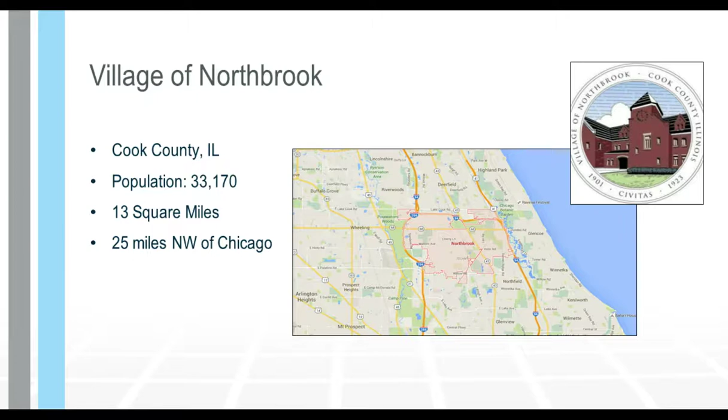The Village of Northbrook is located in Cook County, Illinois. We have a population of roughly 33,170, 13 square miles, and are located 25 miles northwest of Chicago. The Village of Northbrook is known for great schools, spectacular parks and programs, and a high level of municipal services to our residents and businesses.

Unfortunately, sometimes a good master stormwater management plan requires flooding, and the Village of Northbrook is no different in that case. In 1982 and '87, we experienced quite a bit of flooding, with 6.5 and 7 3/4-inch events during those times. In 1987, roughly 818 properties, or 1 out of 12 properties within the village, experienced some type of flood damage which required special debris pickup.

With that, our first stormwater plan was created in 1993. It also created the Stormwater Management Commission, which provided oversight of all stormwater-related issues within the village. They reviewed the causes of flooding, projects to reduce the flooding, and property protection programs. In 1996 and 2002, the program plan was updated for current cost and completion of projects.

After that, we had two more significant rainfall events, one in 2008 with roughly 6.5 inches of rain, and another in 2011 with 5 1/4 inches of rain. This really put a focus back on stormwater, and we'd only completed roughly 9 projects since the inception of the plan, and stormwater still was a village-wide issue.

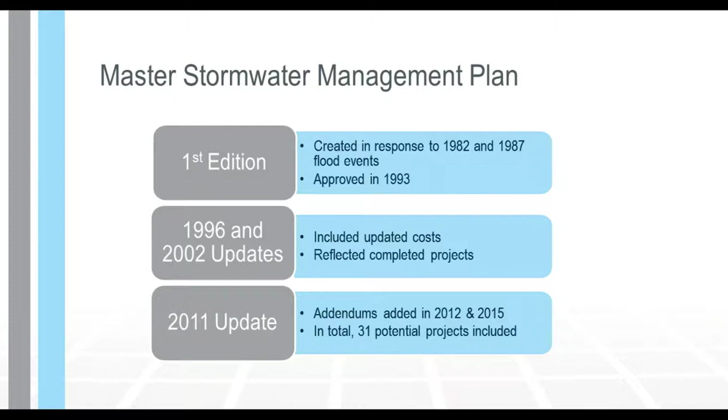Since 2012, the village has completed roughly 11 projects at an estimated value of $18 million. There are 20 projects remaining with an estimated value of $13 million to complete.

One project included in the master stormwater plan was the detention facility at Wescott Park, shown above in red, within the Sunset Field subdivision. This is one of our larger watershed projects, and it stood out from the rest because this was an area where we had previously identified projects as unbuildable. It was the most expensive project within the plan.

It provided a large open space in the red area, owned by the Park District and the school district, for potential surface detention. It could provide large relief for properties in the neighborhood. The watershed project also provided benefit to downstream people who receive flooding, and would allow the building of 3 other future neighborhood projects once completed.

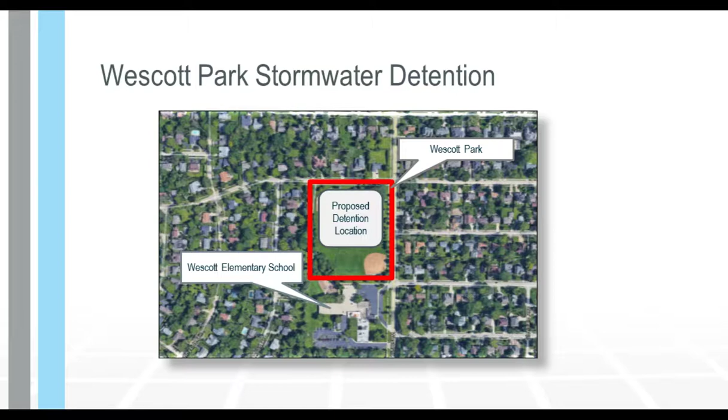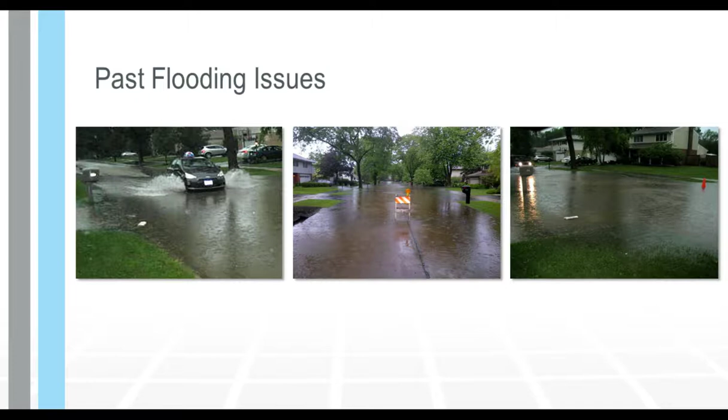As mentioned, there's been past flooding issues in this area along Wescott Park by Farnsworth Lane and surrounding streets. Unfortunately, during flooding events, 2 to 3 blocks are impassable for our emergency vehicles. Sunset Field Subdivision is an older subdivision, platted in the 1950s, built without any detention and with undersized storm sewers compared to today's standards. The only real open space available in this neighborhood is at Wescott Park.

During the study phase of the project, we knew that the Master Stormwater Plan project was feasible for Wescott Park. Unfortunately, we wanted to make sure we refined the project due to the potential cost and the need for interjurisdictional cooperation, since the village does not own any of the land the detention would be built on.

The area in red on the slide shows the extent of flooding prior to the project. There are roughly 10 structures that experience flooding during a 25-year event, and roughly 83 properties that have some type of flooding during these events. During the study period, the village retained Baxter and Woodman to provide an evaluation to refine the project details prior to going to design.

One of the things they looked at was different surface detention that could be provided, underground detention, and also a hybrid combination of the two. These different options were presented and discussed with both the Park District and the school district to try to identify a project which was agreeable to them, since it needed to be buildable, especially since it was going to be on their property and not the village's.

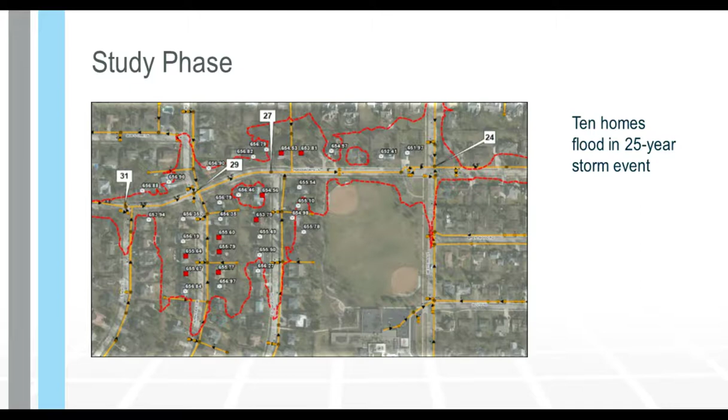At the end of the study phase, this graphic shows where the proposed detention location would be and the proposed sewer route. The village would have preferred a configuration allowing surface detention, but unfortunately we had to keep the detention located on the Park District property, shown as the hashed area with the proposed detention identification.

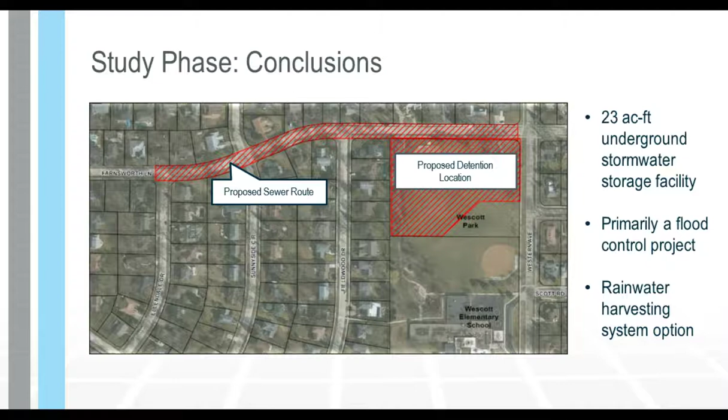We also had to keep a portion of the south ball field playable during construction. The 23 acre-feet of storage is entirely on the Park District property, and the other storm sewer infrastructure improvements are within the village's right-of-way.

At the conclusion of the project, using XP-SWMM, the results shown in blue are the impacted areas of inundation after the project would be complete. It provides 25-year level protection for all homes.

The 10 homes that had prior flooding during the 25-year event were completely eliminated from flooding, and there were also 83 other homes that saw some benefit from the project. One of the key components is that while we didn't eliminate all flooding, emergency vehicles do have the ability to pass these areas during flooding events.

At the end of this phase, Baxter Woodman identified an opportunity to store and reuse stormwater for irrigation of the ball field, and a possible partnership with the Metropolitan Water Reclamation District of Greater Chicago, or MWRD.

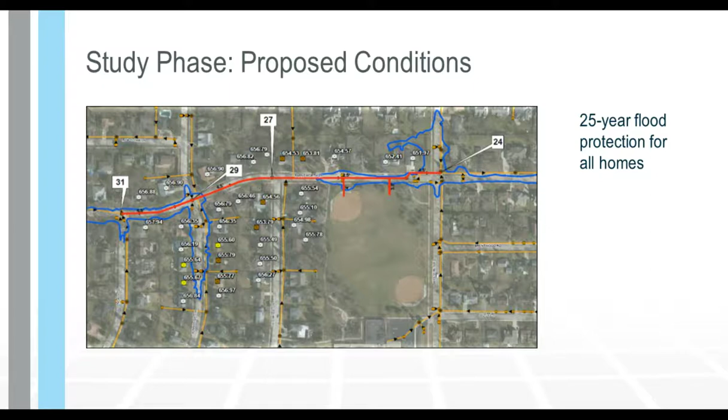Due to the coordination involved, prior to going to full design, the village worked with Wescott Elementary School and the Park District to set up the ground rules for the design process. We wanted to make sure that everybody was on board with the parameters so that any future changes could be avoided, along with costly changes to design.

Some of the things identified were defining the construction limits. As previously mentioned, the south ball field needed to be playable throughout construction for not only the school's use but the Park District's as well. We had a 9-month construction schedule because the north ball field, which the Park District regularly programmed, would be out of use for roughly one whole season, so we had to get that done so it could be used the next year. It also identified issues with traffic for school drop-off and pickup due to the large amount of truck traffic that would be generated by the project.

It also identified that the village would be installing an irrigation system for the ball fields, which would be owned by the Park District in the future. During the design phase, the village entered into a formal intergovernmental agreement with the Park District to finalize the details of the agreements.

As previously mentioned, the village had an opportunity with MWRD to build a rainwater harvesting system for this project. The village's master stormwater management plan had identified other best management practices that could be used, but nothing to this scale. The village and MWRD have worked on multiple other projects together, but none with really a green component. So the village and MWRD were really excited about the rainwater harvesting component of this project, and it would be a showcase project not only for them, but for the village as well.

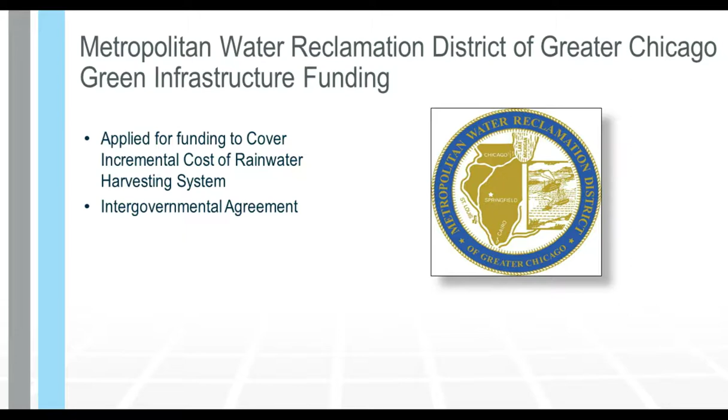Thank you. Paul? Thank you, Kelly.

As Kelly mentioned, the village ultimately chose the underground detention option, and Baxter Woodman was authorized to begin final design in the fall of 2014. The total cost of the project was estimated to be about $10.3 million without rainwater harvesting, which would only be included if grant funding became available to cover the additional cost.

The main components of the design were a 23 acre-foot underground detention facility, 3 blocks of new 42-inch diameter sewer to convey stormwater to the storage vault, constructed in parallel to an existing 42-inch sewer, high-capacity inlets to capture roadway flows, a restrictor to limit downstream discharges, and an irrigation system to water the ball field.

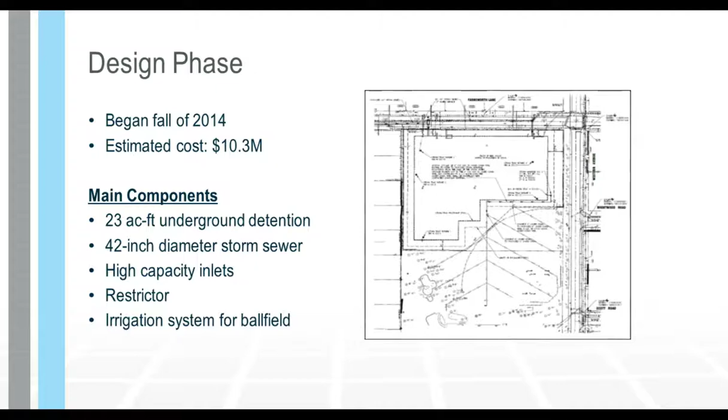Once the underground detention option was decided on, the first major design decision was choosing the type of underground storage system we would use. We needed to make sure whatever we selected would satisfy all of our design criteria and meet the village's expectations. First, the height and footprint of the detention facility were dictated by our site constraints, so the required 23 acre-feet of storage had to fit into the available space.

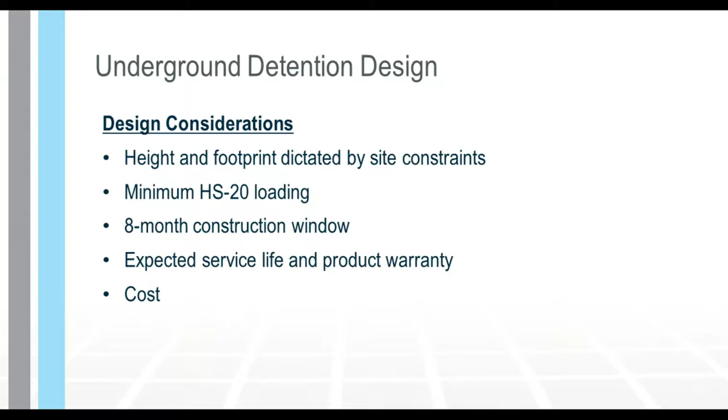The structure also needed to provide minimum HS-20 loading, because at some point the driver of a truck or emergency vehicle might drive over the field without knowing what's been built underneath it. The village and park district had agreed that use of the north ball field would only be lost for one season, so construction had to be completed in an 8-month construction window. The detention system would need to provide a long service life with a strong warranty. And finally, cost was very important—the village needed the construction cost of the underground detention to fit into their overall budget for the project.

The village wanted the detention to drain by gravity so they wouldn't have to deal with operation and maintenance of a pump station. Therefore, the invert of the receiving storm sewer limited the maximum height of the storage vault to about 10 feet.

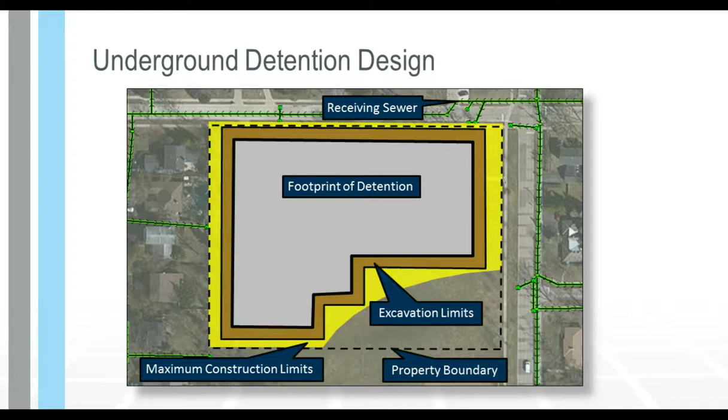We considered 5 main types of underground storage systems for this project. The first was StormTrap's DoubleTrap product, a modular precast concrete system. This type of detention provides very efficient storage, which was important given our particular site constraints. In fact, about 93% of the total volume would be open and available for storage for our particular structure dimensions.

We also considered corrugated metal pipe systems, which provide storage in circular pipe as well as the void space of the backfill. Those options offered some potential cost savings. However, the system provided less efficient storage than StormTrap, making it a very tight fit for our site. Additionally, the village had some concerns about the durability of CMP and the limitations of the warranties that came with the products we considered.

Another option we looked at was an open chamber with a concrete slab roof supported by reinforced stone aggregate piers and walls, which would essentially be made up of stacked gabions. About 64% of the total structure volume was calculated to be available for storage, which wasn't going to work for our project.

Cast-in-place concrete storage was another very efficient option, which offered a lot of design flexibility. However, it would have required structural engineering, and it was ultimately ruled out because the curing times wouldn't work with our 8-month construction window.

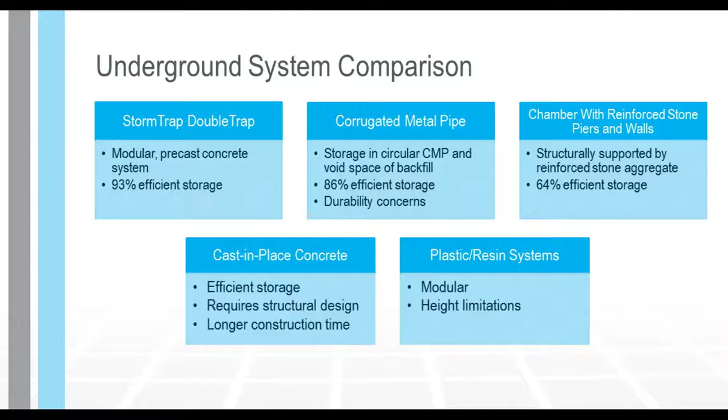After considering all of these options along with our input, the village decided to go with StormTrap's DoubleTrap product for the underground storage vault because it was a perfect fit for the project needs. The system is made up of modular precast concrete units which can be configured into just about any footprint. The structure can be up to 11 foot 4 inches tall, which worked with our proposed height of 10 feet.

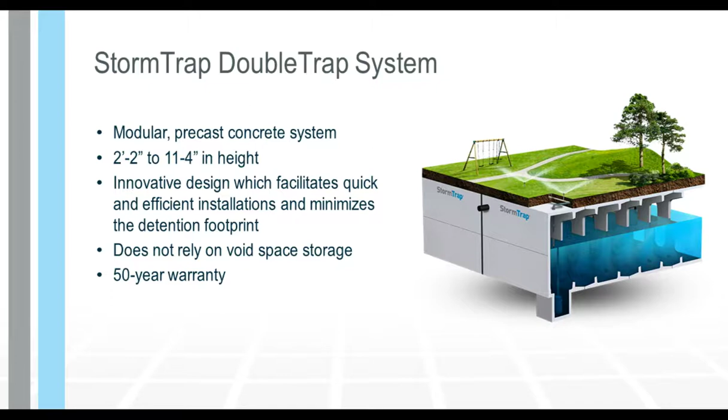The StormTrap design allows for quick installation, and the pieces provide very efficient storage, which minimizes the overall footprint. The system doesn't rely on void space storage, which means any sediment accumulation can be easily accessed and cleaned. And finally, the 50-year warranty that StormTrap provides really stood out from the other options we considered.

In a minute, I'm going to play a short video showing a pretty basic rendering we put together prior to construction, which showed what the StormTrap and restored ball field would look like after completion of the project. We used this at a public informational meeting to give residents a better understanding of the project and the scale of the underground storage that was going to be installed.

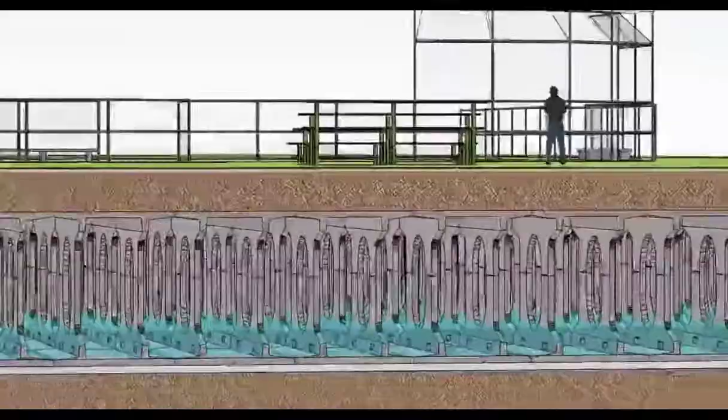The village authorized Baxter and Woodman to move forward with the design of the rainwater harvesting system alternate in August of 2015, when the village's intergovernmental agreement with MWRD was being finalized. The concept of the design was to store water in the StormTrap for reuse and then pump that water from the StormTrap to the irrigation system.

The system would also use available weather forecast data to automatically drain down the StormTrap in advance of large storms, making sure that the full storage volume would be available for stormwater when it was needed the most.

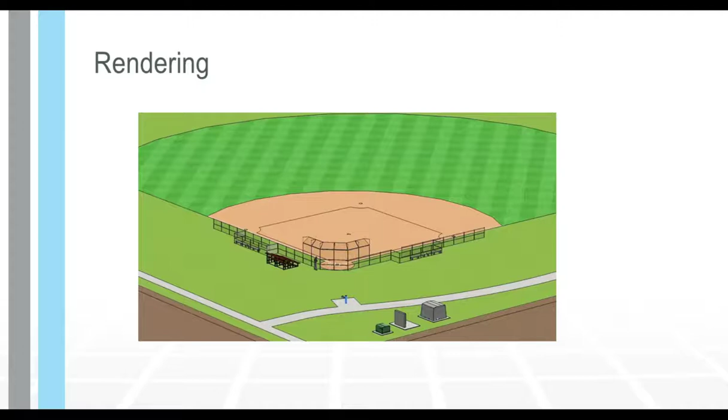Because the Illinois Department of Public Health considers spray irrigation systems to be plumbing systems, they had to review the project and issue conditional approval.

IDPH required that the irrigation system meet NSF 350 standards for water quality. They also required monthly testing for E. coli by an IEPA-approved lab for 1 year after startup. And also, irrigation hours had to be limited to the nighttime to avoid unnecessary exposure to people. Even though the water will be treated, it still won't be potable, and they don't want people being sprayed inadvertently or kids running through the sprinklers.

The village continued to look for opportunities to use harvested water in other ways as we were progressing with our design, and they eventually asked us to add a spigot to the project, which could be used to fill tanks for watering plants and trees at other locations around the village, and for vac trucks and street sweepers as well.

The Illinois Department of Public Health typically doesn't deal with requests to use harvested water off-site, so this complicated the approval process a little bit. We did eventually receive approval with additional conditions. They required installation of a locking mechanism on the spigot and non-threaded fittings so that it wouldn't be confused with the potable water source. And then once the water is taken off-site, IDPH won't allow any type of spray application. They will allow the village to use harvested water for vac trucks and street sweepers because they aren't sanitary equipment.

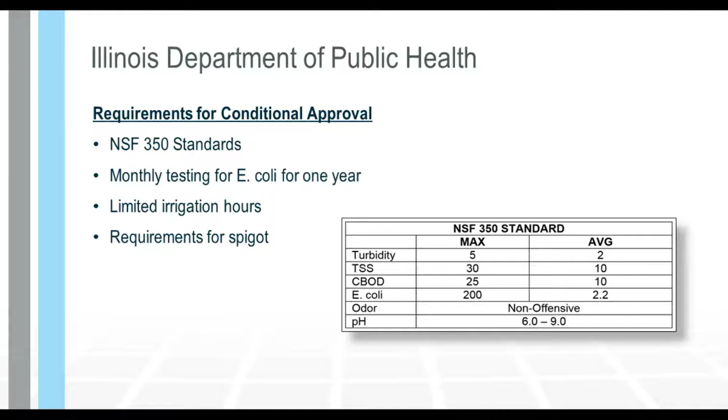In order to meet IDPH's requirements for water quality, two major components were added to the design. The first is pretreatment filtration upstream of the StormTrap, and the second was UV sanitization to treat water before pumping it to the irrigation system.

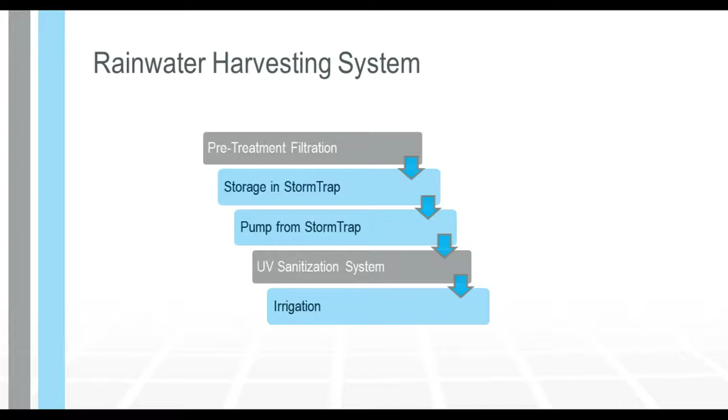Pretreatment filtration is provided upstream of the StormTrap with a precast concrete chamber located in line with the inflow pipe. That chamber contains a filter which captures leaves, trash, and other floatable debris, and it also removes suspended solids and hydrocarbons.

Filtration is important for the functionality of the rainwater harvesting system because it prevents clogging of the sanitization and irrigation equipment. Additionally, it reduces the frequency of maintenance required to clean debris and sediment from the bottom of the StormTrap.

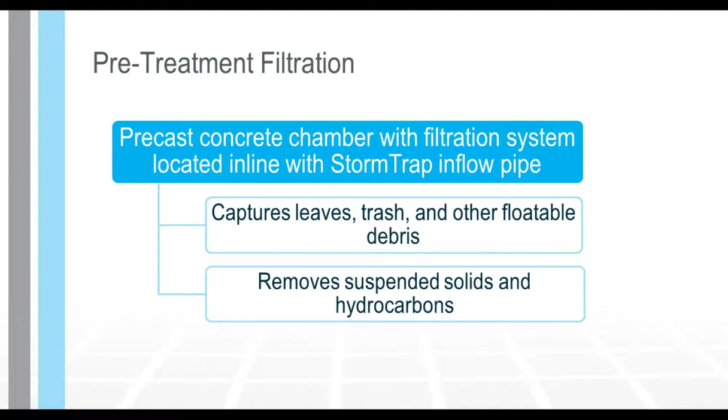Once the inflow water is filtered, it needs to be stored in the StormTrap for reuse. Our original design concept was to install a gate or valve at the outflow pipe to hold back water. The main advantages of this type of system would be it would require no modifications to the original StormTrap design, and also the StormTrap would drain entirely by gravity.

However, watertight sealing of the joints would be required over the full footprint of the StormTrap, which we learned would be more expensive than anticipated. Additionally, the gate or valve would need to default to open in any sort of failure condition. So in the case of, for example, power loss, or if the water level sensors were giving back bad readings, we would need to find a solution that would default to open to make sure that all of the stormwater storage was available. We ended up ruling out this option, however, because the estimated construction costs wouldn't fit within our available budget.

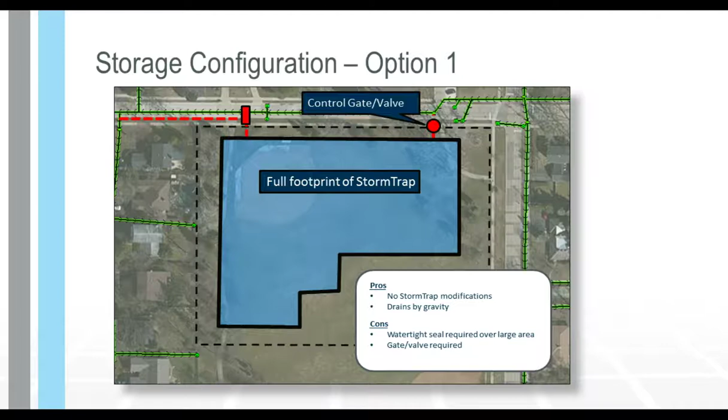The second option we considered was to store approximately a half-acre foot behind a partition wall with outflow controlled by a gate or valve. Calculations showed us that half an acre foot of storage would provide about 1/8 of the required seasonal irrigation water without replenishment. Based on a study of past rainfall patterns, we determined this volume should be adequate to irrigate without ever needing to supplement the harvested water with a domestic water supply.

The advantages of this design were that it reduced the watertight footprint required, lowering the cost from the original concept that I just discussed.

However, the design would still require a gate or valve which defaults to open during failure, and more importantly, the partitioned area would fill up first, increasing tailwater elevations acting on the inflow pipe. We found this would increase upstream flood elevation for certain storms, which is not a good thing for a flood control project, and eventually we ended up ruling out this option as well.

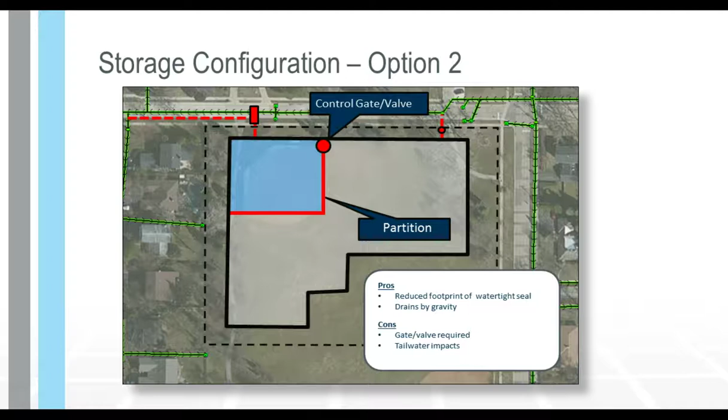The third storage option we considered ended up being our final design. It provided approximately a half-acre foot of storage below the gravity outlet with a section of taller 11-foot 4-inch StormTrap pieces.

The advantages of this design were that it was the least expensive option and fit within our budget. The additional storage volume could also be made available for detention by draining it down in advance of large storms. And since the reuse volume would be bonus volume, failure conditions and weather prediction would not be critical to achieving the intended project benefits.

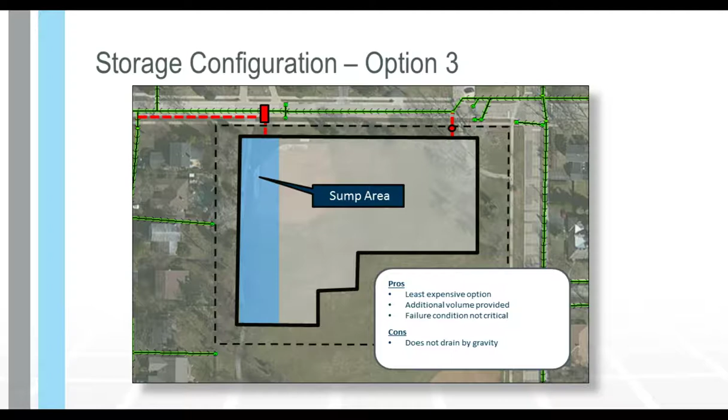The only major disadvantage of this design was that the StormTrap would not drain by gravity, and a small pump would need to be added.

In order to accommodate the rainwater harvesting system, the StormTrap had to be divided into two subsections. The first is a sump area, 11 foot 4 inches in height, which stores water for reuse, and then the remainder of the structure, which is 10 feet tall.

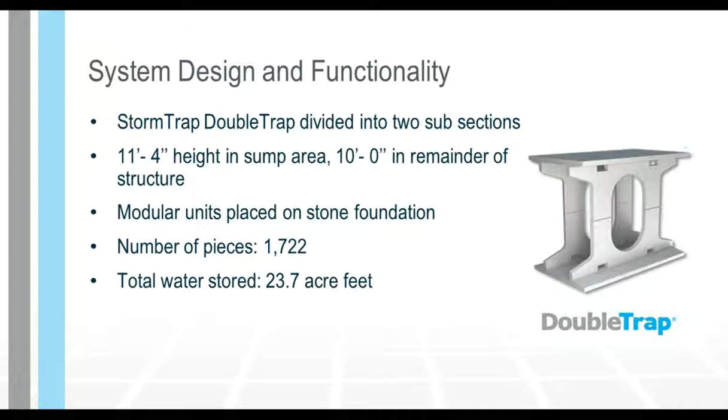Both of these areas are made up of modular units placed on an aggregate stone foundation. The total storage volume provided in the final design is 23.7 acre feet, and a total of 1,722 individual StormTrap units were needed.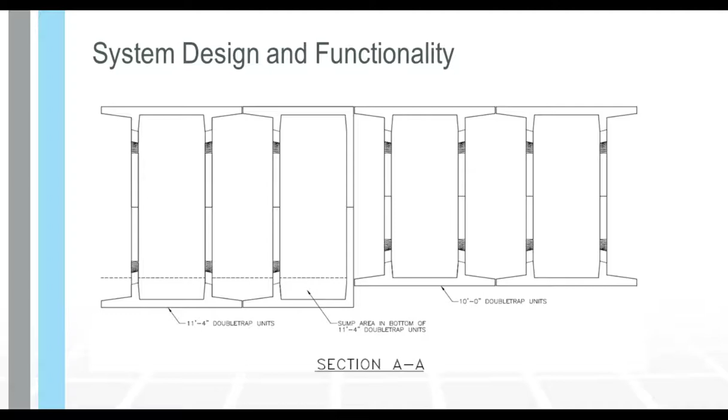I mentioned earlier that the project included storm sewer improvements which convey storm water from upstream areas to the storm trap. Storm water which infiltrates into the soil directly above the storm trap can flow into it directly through gaps at joints between the individual units.

A 6-inch layer of aggregate stone was placed below the topsoil layer, which allows water to flow into these gaps more freely. A geogrid and double layer of geotextile fabric were installed above each gap to prevent stone from falling into the storm trap.

Additionally, another layer of geotextile fabric was installed above the aggregate layer to prevent topsoil from moving into the stone.

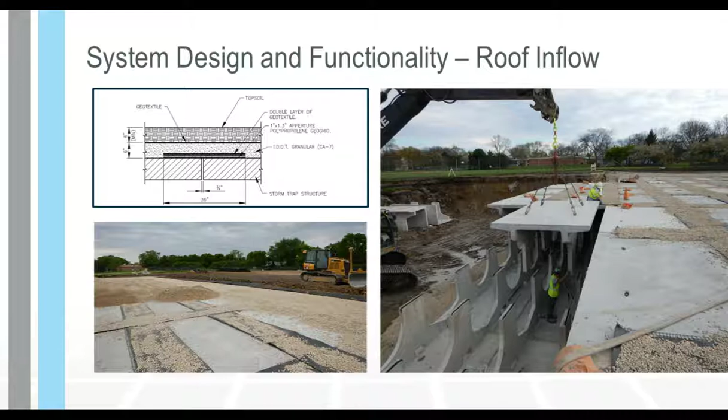Water is held in the sump area of the storm trap for reuse by adding a watertight seal along each joint to keep water from seeping into the soils below the storm trap floor.

All joints in the sump area were sealed with Xypex Patch'n Plug, a hydraulic cement compound that is high strength, fast setting, and also non-shrink. Sealed joints were then tested following construction to ensure there were no leaks.

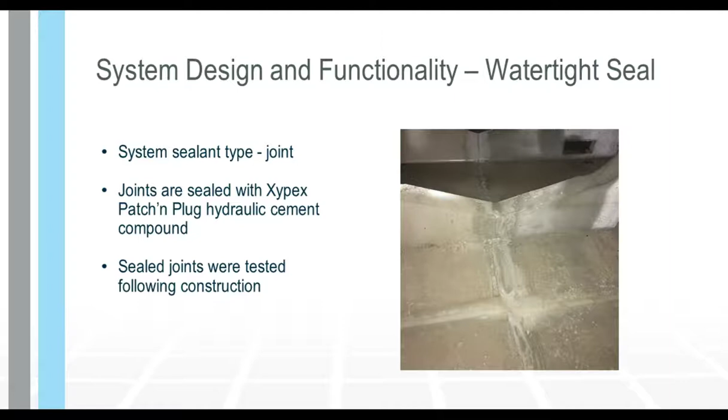Before water can be pumped from the sump area of the storm trap to the irrigation system, it will pass through a UV sanitizing system.

The system treats the water with UV bulbs, which kill bacteria and pathogens with radiation. It also includes additional filters to remove suspended solids, which can reduce the effectiveness of the UV treatment.

Advantages to UV treatment are that it requires minimal contact time, it's non-chemical, and also it doesn't produce any odor.

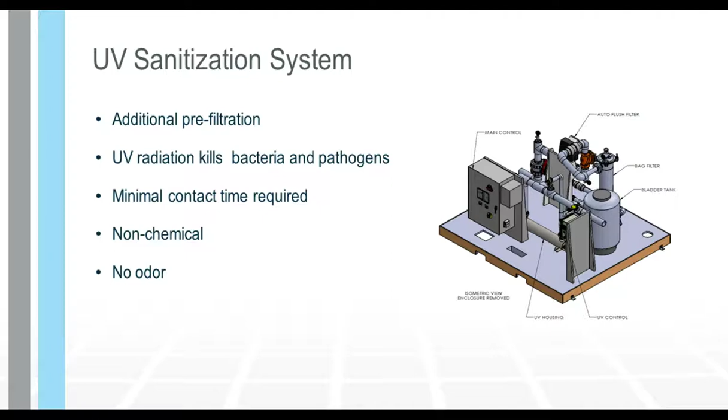Baxter and Woodman's control systems integration team developed automated controls for the rainwater harvesting system, which use online weather forecast data to pump stored water to the downstream sewer in advance of large storms.

Pumping out the stored water allows us to take advantage of additional storage volume provided in the sump. To do this, we used results from our XP-SWMM model to develop a conservative correlation between predicted rainfall depth and the expected water elevations in the storm trap.

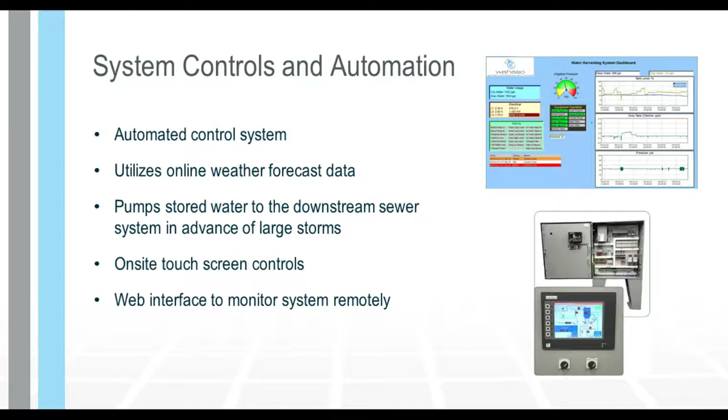Our touchpad control screen is located on site in a locking enclosure, which can be used to check on the system, adjust settings, view alarms, and shut down or start up the system. A web interface is also available to monitor the system remotely.

One big thing to take away from this project is that collaboration, negotiation, and public outreach can be critical for successfully completing a project which will benefit the entire community.

In our case, the ideal location for detention was a park that was not owned by the village, which is a pretty common situation in densely populated areas like Northbrook, Illinois.

When using a public open space for detention, underground storage is a great option to preserve or improve the current land use. For Wescott Park, storm trap was a great fit, and it helped us meet our project goals while also working within our site constraints.

This project was a great example of opportunities which exist to incorporate green infrastructure into more typical stormwater projects. Not only were we able to fit a rainwater harvesting system pretty seamlessly into the framework of our original design, MWRD also partnered with the village, covering the added costs of those improvements.

Lastly, technology exists which enables us to move beyond passive stormwater systems to maximize the benefits provided. For this project, we were able to use weather forecast data to have our reuse storage volume double as bonus stormwater detention. I think we'll be seeing more of these types of systems moving forward, including retrofits of existing detention basins, especially in areas where available space is hard to come by.

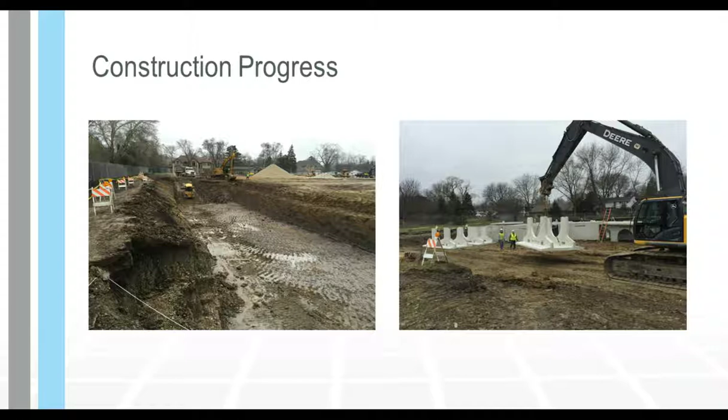I'm going to wrap up with just a few photos taken during construction, which was completed about 3 weeks ago, and then also a short video. The photo on the left shows excavation within the park to prepare for installation of the storm trap. On the right, you can see storm trap pieces, which were just delivered to the site, being moved and temporarily stored on site.

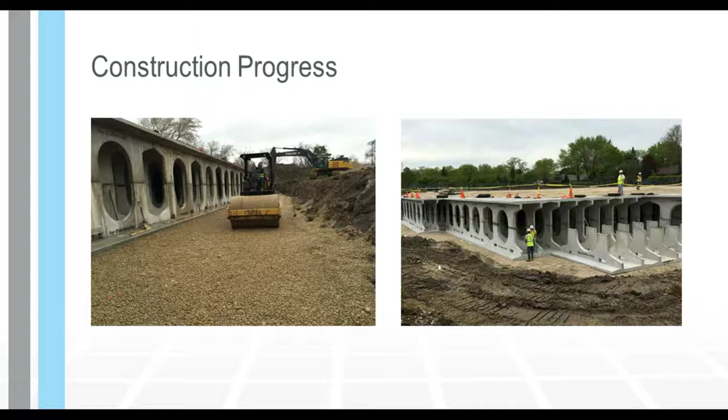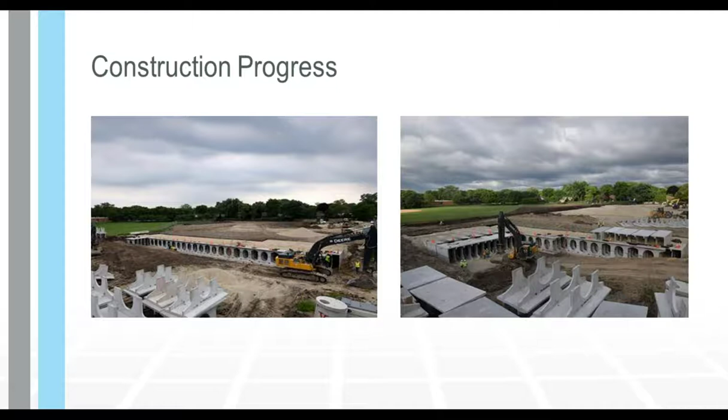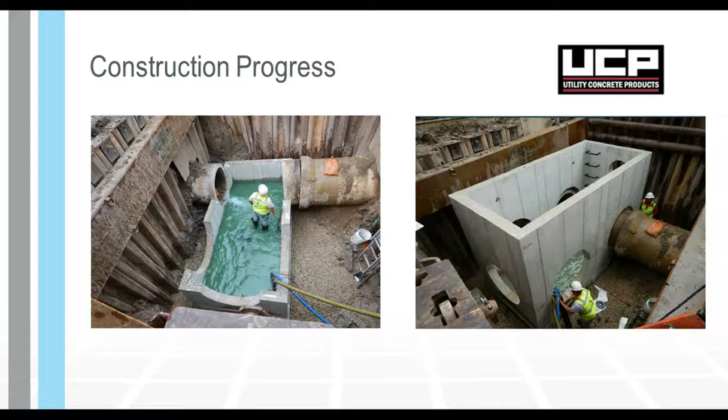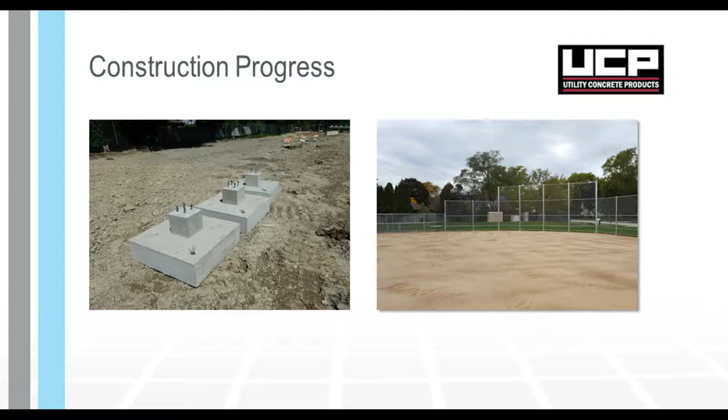We didn't have enough cover over the storm trap to use typical concrete post foundations for the ball field's backstop and dugout fences. So the photo on the left shows spread footings we designed to support the posts on top of the storm trap. The photo on the right shows the restored infield and the installed backstop fencing.

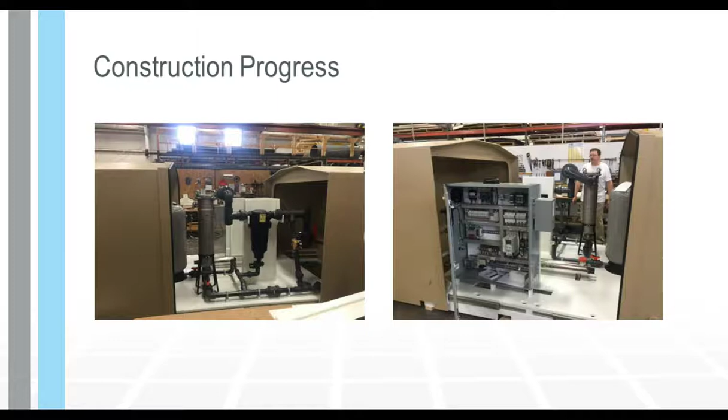Here are a couple pictures of the water treatment enclosure and the controls as they were being fabricated.

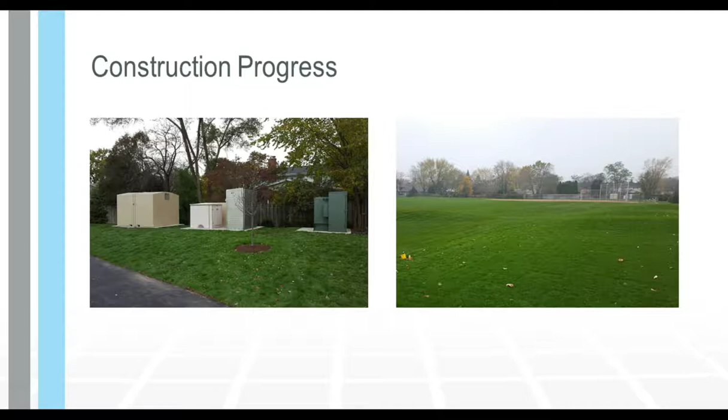And then lastly, here are a couple photos of the restored park. All of the above ground equipment is shown on the left, which includes the water treatment enclosure, the rainwater harvesting system controls, and also the irrigation controls.

And then finally, here's a time-lapse video of construction in the park from excavation all the way through restoration, and then ultimately the ribbon-cutting ceremony when the park was reopened.